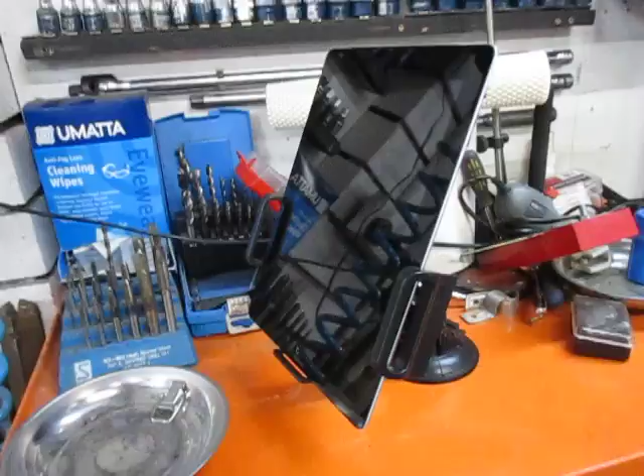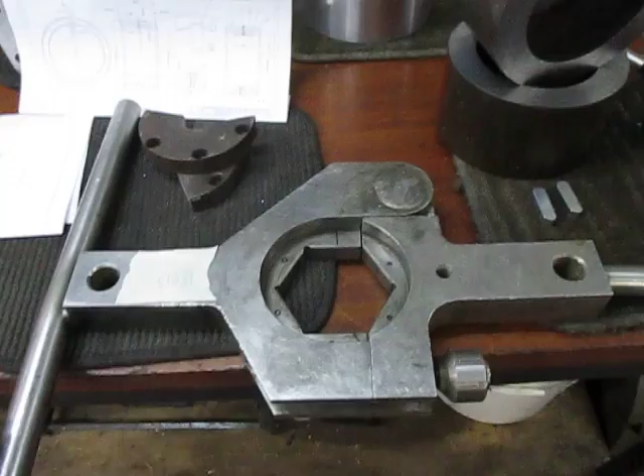So on with the first job. This is a special spanner arrangement. It has an eccentric system that opens up and clamps around devices. In this particular case, it works with a hex. It's got some inserts that go in here for doing other types of clamping.

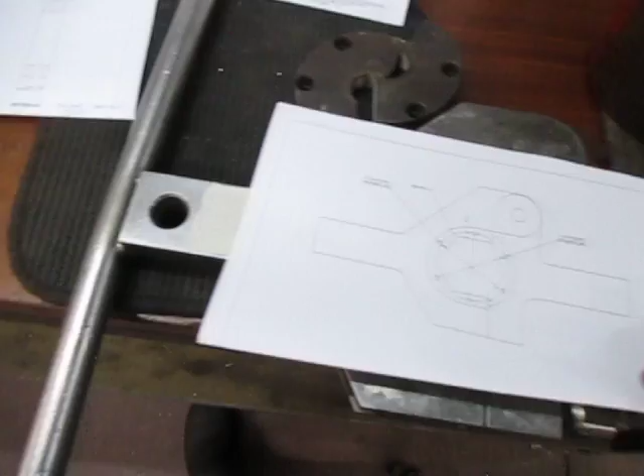Now they have a couple of these. This particular one has never been bored for bolting this on, so we're going to be setting this up, and I'm going to be boring and tapping these holes in here to take this and another insert. Now what I've done today is drafted this up so we can get the exact positioning and dimensions, so that when we make the new insert and this insert, they'll all be able to screw in there correctly.

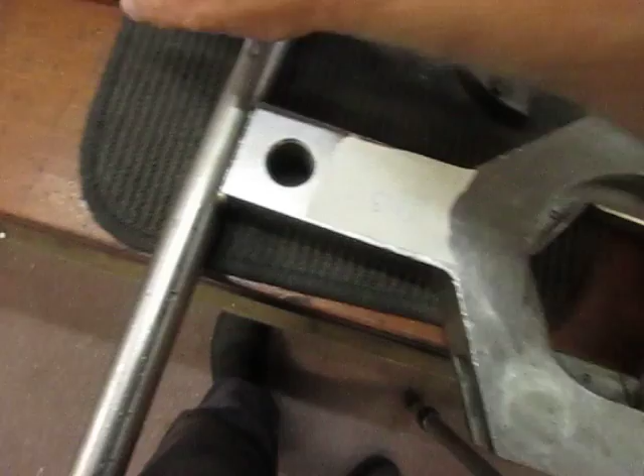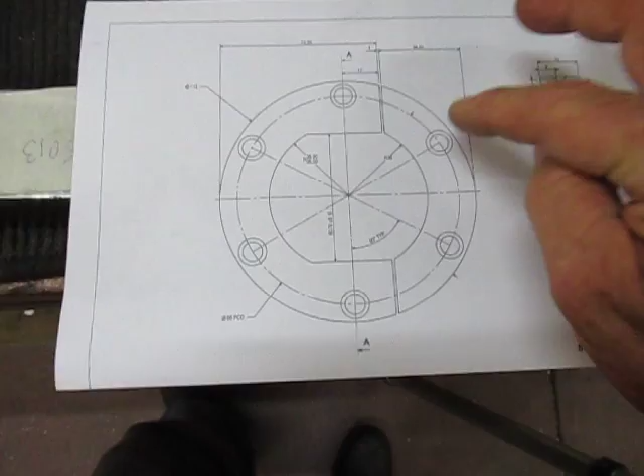So this is the drawing we've drafted up, and this is the part I have to make - it's two flats and the round. What we're going to be doing is machining up these two parts. They're about 3/4 inch thick, 19mm thick. We're going to machine these up, counterbore them, similar to this lot, except this one's going to be cut at this point.

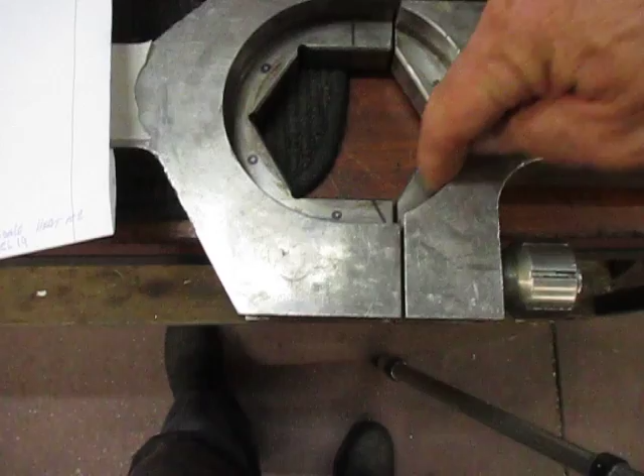That had to happen because otherwise there would not be closure. If we had done it at this funny angle like they made this one, it would never have worked - it would have failed. So it's actually going to sit in here - one section is going to sit in there, and one section is going to sit in here, and that'll screw in. I'll make 6 holes here, although here we only have 5 because this split falls right on the hole. So that's one job I'm going to be getting onto pretty quickly, because they need that fairly urgently.

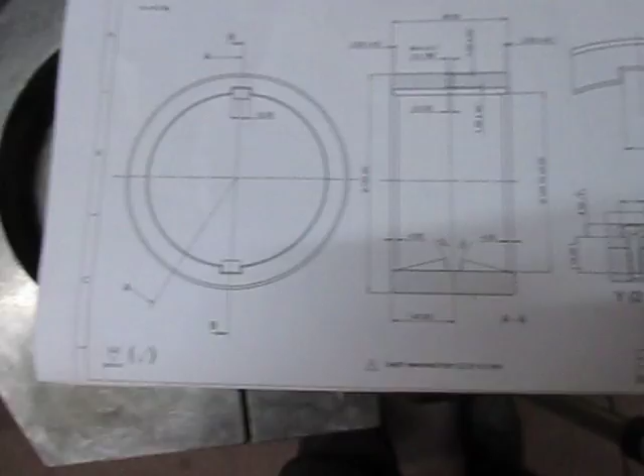The next job, we've got these 2 hollow pieces of hollow bar here, and what I have to do is produce 2 rings, and they need to have keyways in them. So they're going to need to be slotted, and those keyways are going to need to be screwed in. And after I've finished machining, there's a fair bit to machine on these 2 items.

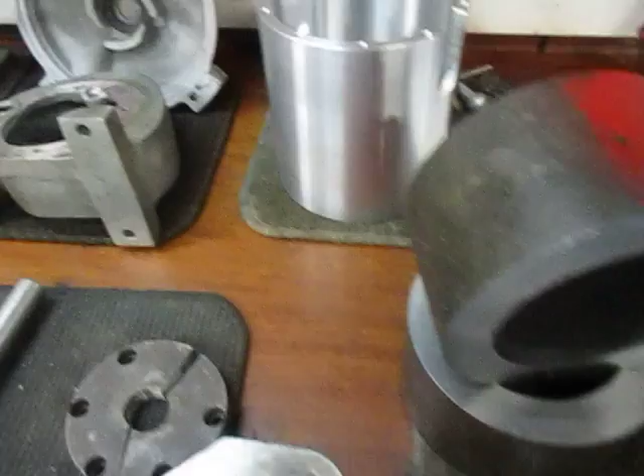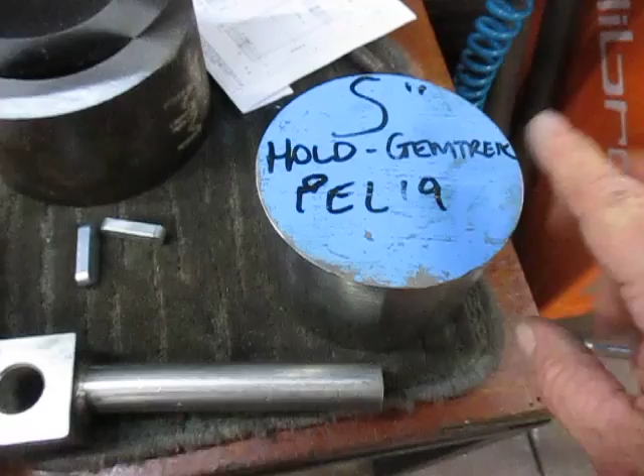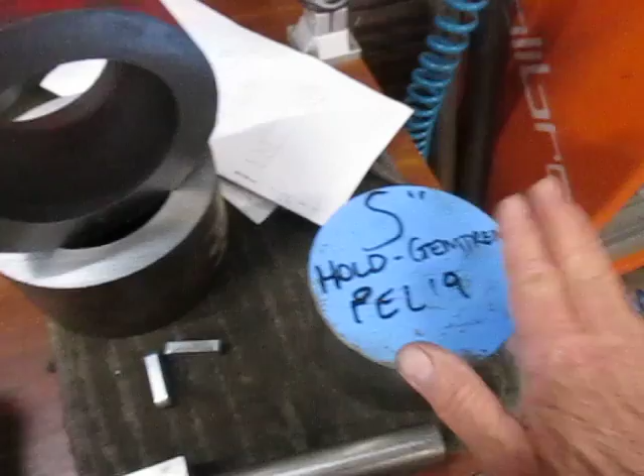So that's another job. On this particular job, that insert we're going to make out of this stainless steel, and that's got its heat number on it. This has to have traceability because it goes offshore, so I have all the paperwork to go with this piece, and I'm photographing it. This will go once I machine it. It'll all be part of this plant.

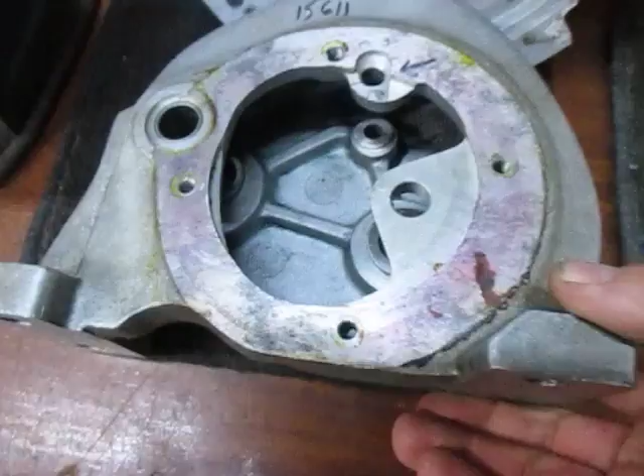Another job I've got is a little gearbox that's come in, and it's got a cracked bearing or bush or shaft housing here that I need to cut out and build up with weld and machine it out. I've got an end shield here, or bearing shield, and it's got broken studs - 4 broken studs around the periphery - and I've had to cut off 4 very long bolts that stuck out here so that I could get to this.

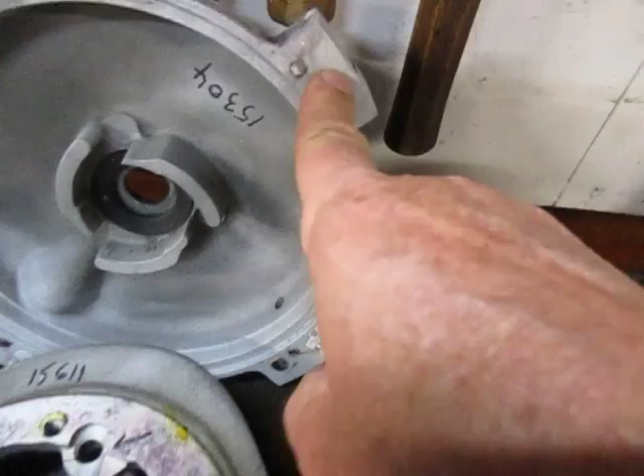And this is going on to the mill. I've already done one this week. This will be the second one, and I'll be getting out all of those. All of these will get new inserts in because they're seized inside the aluminium.

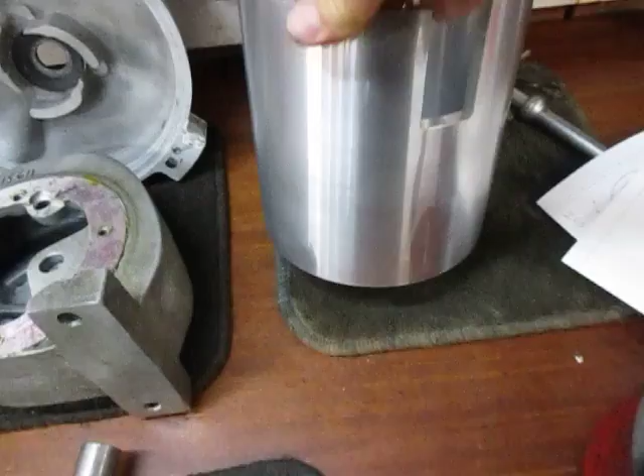I've got this other part that's come in from a machine shop, and it's got a broken tap inside here. So I'll be getting that tap out, and I mustn't do any damage - this is going to be anodized, so I've got to be very careful with that. That's also a subsea job.

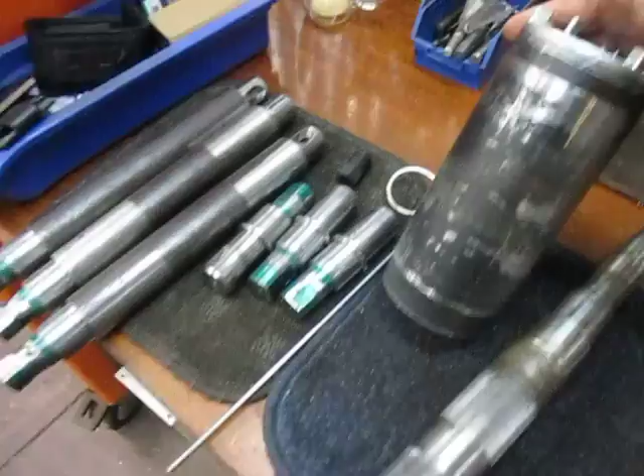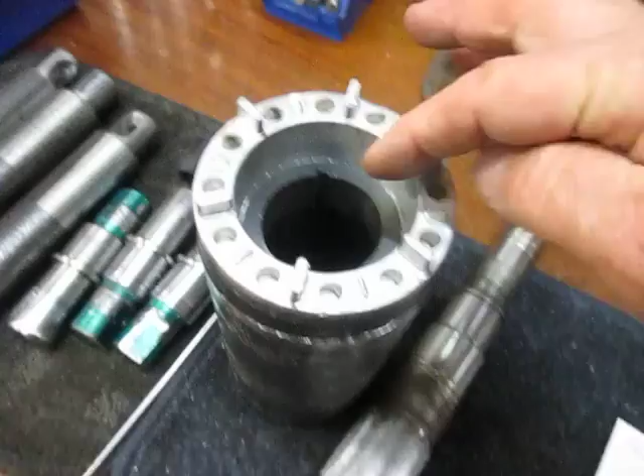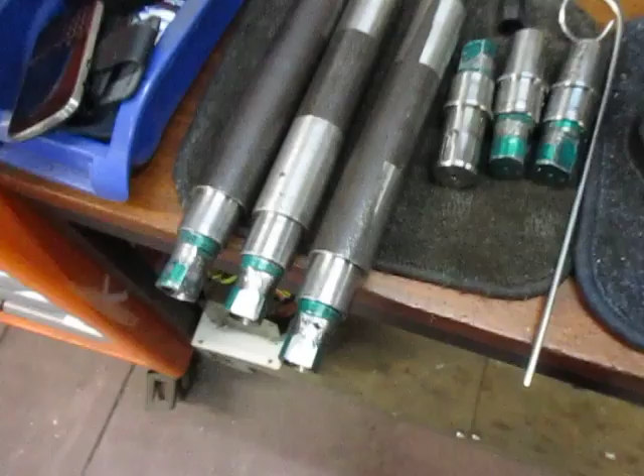Here we have an electric motor, and that had serrated edges on here. They pulled it apart, it was loose, so what they want me to do is cut some keyway through here and slot this and fit a key into it for that to be fitted up. So that's another job.

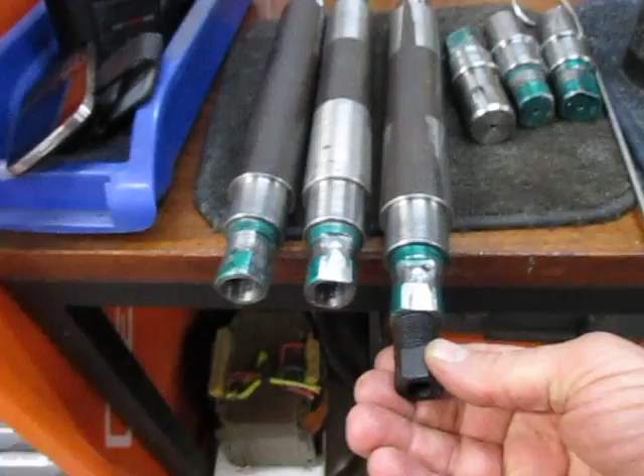What we've got here is the shafts, part shafts, stub shafts for conveyor drive motor belts, and these conveyor pulleys are quite long. They have the motor inside of them, and through the end here the cable gets fitted - there's a gland that goes in there. The cable comes through here, out through there, into the motor windings, and there's a gearbox and stuff in there as well. So I've got to make up - these have been damaged badly, as you can see.

So I've got to make up either 3 new shafts or 3 stub shafts and cut and weld them into this. I haven't decided exactly what. And the other 3 stub shafts from the other side, as you can see, they've been badly damaged, so these ones I've either got to build them up or I'm going to just make 3 new ones.

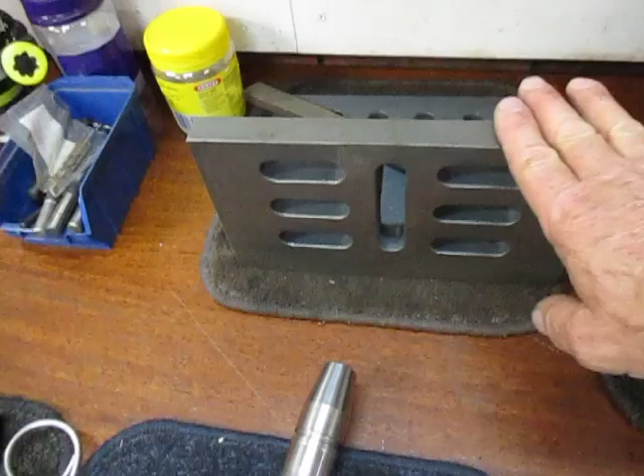Over here I've got an angle plate, a cast iron angle plate that I bought from a supplier. This has got a crack through it, through there. This obviously moved after the casting or whatever, but it was rejected by the client who bought it beforehand, so I've picked that up.

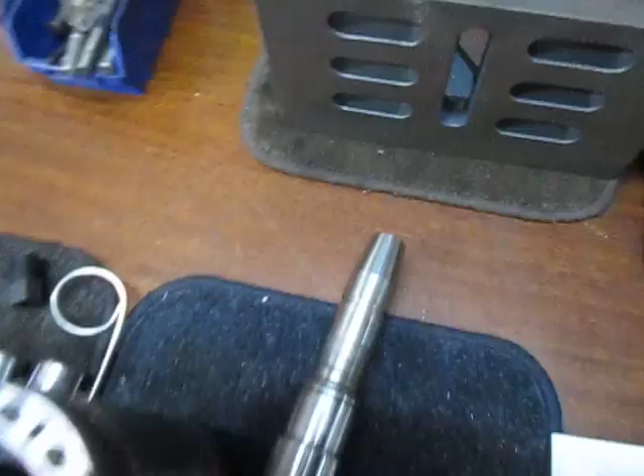I'm now going to grind all that out. I'm going to put some screws in here, machine that down, and then weld up this gap, and then I'll remachine the face, and I'll machine the rough cast face on the other side as well. And that'll join its sister that I have over here in the workshop.

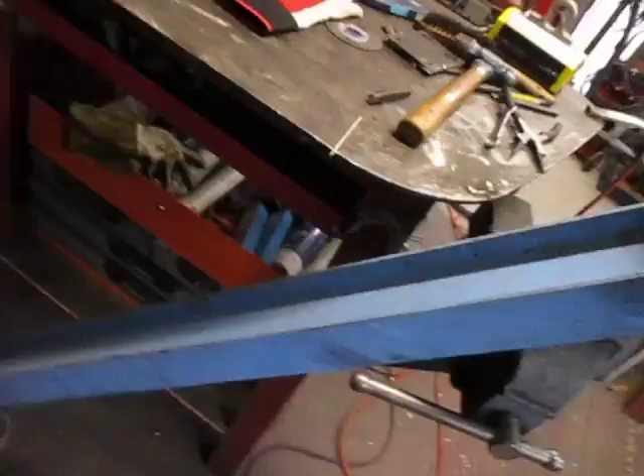So beyond that, we've got another little job here that we did this week. This is an aluminium post from a drill rig arrangement, and this had a little chain vise clips in here, and this bolt was all twisted and bent, so I've made up a new bolt. This time instead of having the head welded, I've drilled and put a roll pin in there, and the only thing I've welded is I've tigged up that nut on this side here that's got to be able to turn.

So apart from that, got a bit of a mess in the workshop. I've got to do a bit of cleaning up, and I've got a swag of other jobs outside the workshop to be done.